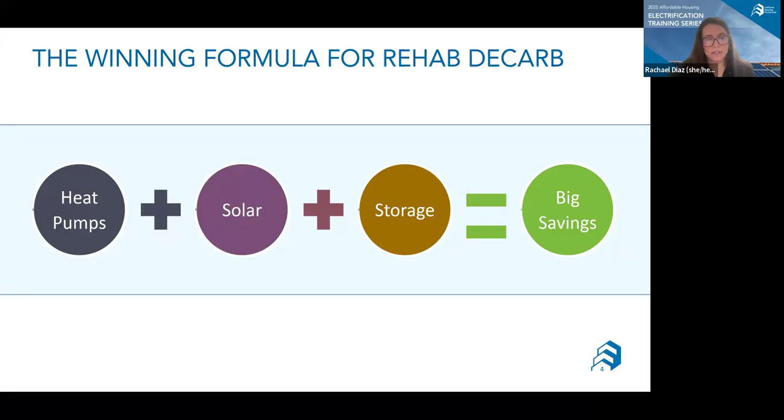Next slide, please. As I mentioned, decarb projects can be a little challenging. They can be expensive, and unfortunately the available funding oftentimes rarely covers the full cost of the project and the scope of work. Most incentive programs like grants or rebates may only provide partial support, which necessitates layering multiple funding sources, whether that be additional grants, tax credits, utility rebates, anything like that that can help close that funding gap. But again, layering not only improves the return on investment, it can help make larger, more impactful retrofits financially viable.

Next slide, please. Thank you. So first, when starting your project, it's important to start by defining your scope of work. That usually means beginning with something like an energy audit or a feasibility study to understand what's possible at the project site. And then from there, you'll need to prioritize measures that are eligible across perhaps multiple programs, things like heat pumps or building envelope upgrades. Those things tend to have the most overlap between the available incentive programs out there.

And once you've identified your measures, the next step is really to identify which funding sources apply. This could include federal, state, utility, and local programs. You really want to pay attention to that stacking piece of the puzzle, because there are certain programs that have restrictions on co-layering with other programs. Some programs just don't pair nicely, or there are sometimes stipulations around participating in some programs to cover the same technologies. So that piece is a little tricky. You'll want to pay close attention.

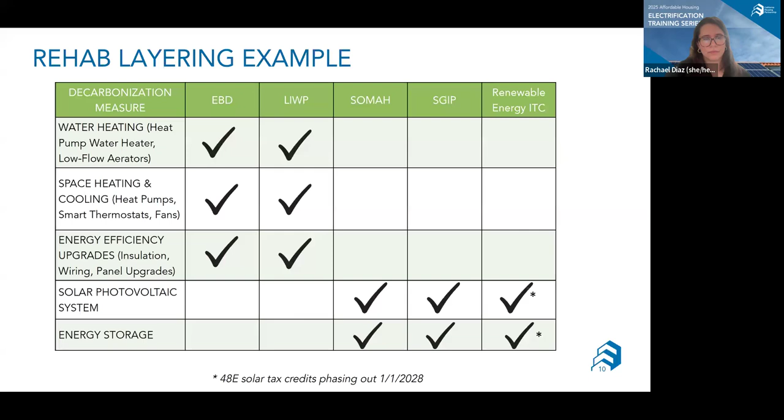Moving on to new construction, there aren't as many incentive programs out there for new construction as there are for rehab projects or standalone retrofit projects. But there are still some great options out there, both at the state level and regional level.

And the partnership does help to implement the Build program, so if you do have a project in mind, you can always reach out to us. Ian is our great lead here. So definitely recommend the Build program as a resource for new construction projects.

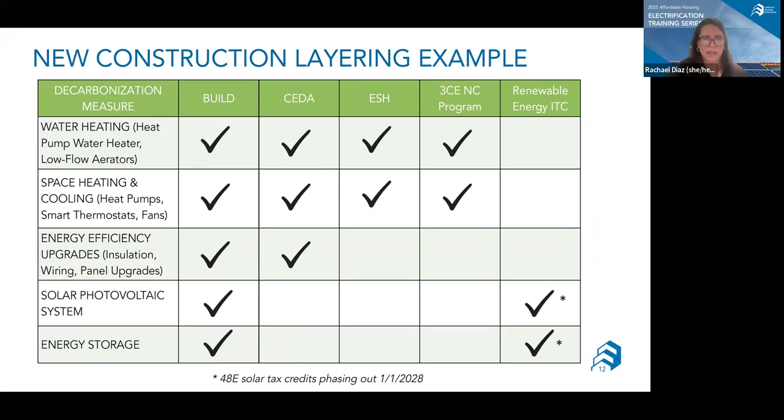Here is a similar breakdown of some of the key new construction programs and financing sources, along with each of the measures that these programs help to support. And as you can see, Build does have a lot of check marks here, so it is again a really great starting point and resource for folks.

Lastly, in addition to the incentive programs that I just walked through on the previous slides, tax credits can really help to make a project more affordable and viable.

It is important to keep in mind, though, that some of the tax credits, like the 48E solar tax credit, will only be available for a limited amount of time and will start to phase out very soon. I believe the date is after December 31st, 2027. So you'll really want to keep in mind these important timelines if you are planning to use solar tax credits for a solar project.

Some of the tax credits are remaining unchanged, but it's important to note that solar specifically will be impacted. So I'd recommend revisiting last week's session to get a rundown or review some of the upcoming policy changes that'll be impacting things like tax credit availability.

I know Andrew did a really great job last week breaking down some of these updates, so that recording should be made available soon to folks, either via email or posted directly on our YouTube page. So keep a lookout for that.

Definitely recommend revisiting, or ask questions if you have them about some of the tax credits, but definitely recommend that training as a resource.

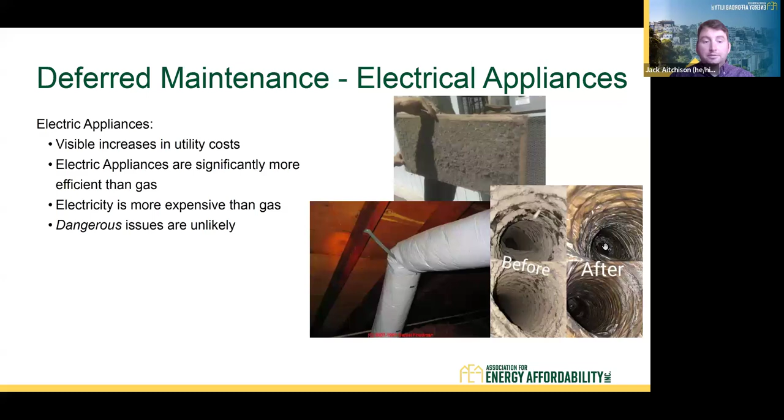Conversely, with gas systems, if you defer maintenance, you may not see a substantial increase in your utility costs. That's because they are already starting at such a low efficiency. Most gas wall furnaces are around 65% efficient, most gas forced air furnaces or water heaters are around 80 to 85% efficient. So if you're operating in that 60 to 80% efficient range and you have some deferred maintenance, your efficiency may drop 20%, which you're not going to see on your utility bills. That's only a slight increase in the consumption of gas.

However, when you defer maintenance on gas systems, you are going to see dangerous combustion safety issues occur. Now, the Association for Energy Affordability.

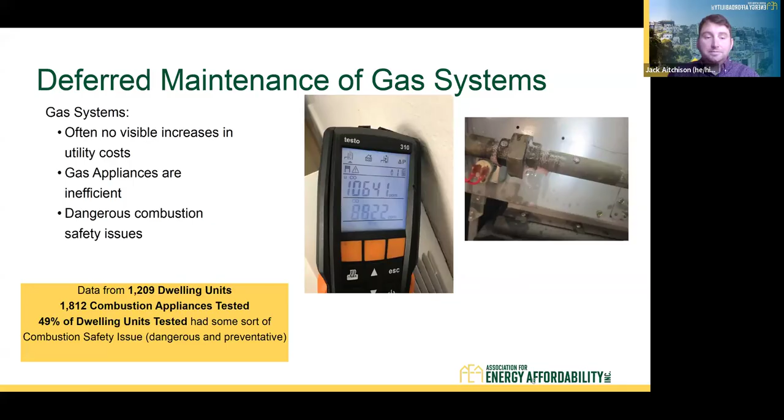When you are going into units for standard inspections, you should take a look at the air filter, maybe bring some cleaning material so that when your maintenance staff is inspecting those units, they can clean that air filter. Oftentimes with heat pumps, those air filters are reusable, so they're not like a forced air furnace where you have to actually replace the full filter. You can clean them. The heat exchanger and coils, so that outdoor coil, depending on your air quality, you may need to clean it more frequently.

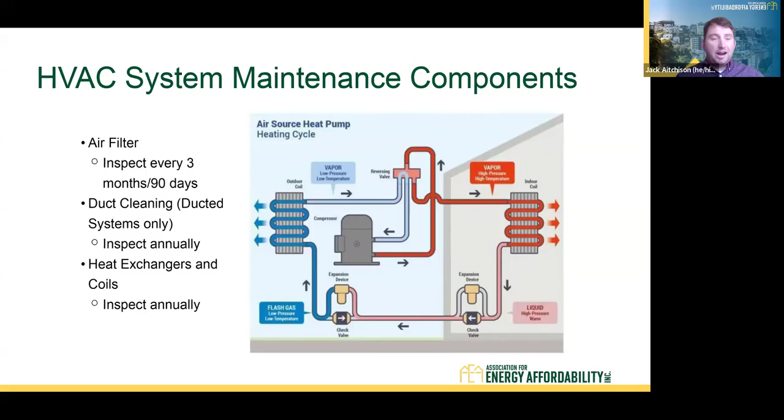So like I mentioned, I went into a little bit of detail on HVAC maintenance, but the focus of this HVAC maintenance and water heating maintenance is these tables here, and there's one for water heating as well. This is comparing the maintenance for electric heat pump heating and cooling versus a gas central furnace plus split air conditioner versus a gas central furnace.

So electric heat pumps are essentially air conditioners. The only difference is they have a reversing valve that allows the refrigerant to flow in the reverse direction, so it allows you to heat and cool using the same appliance.

If you take a look, indoor air filter inspection slash replacement, you're going to have to do that for both your electric heat pump heating and your gas furnace plus split air conditioner, because you have that air conditioner, which is essentially a heat pump. So you see all that overlap between gas central furnace plus split air conditioner. Now, if you just look at the gas furnace, you still have to do the indoor air filter replacement. If you have ducts, you still need to do the duct cleaning, but you don't have that indoor and outdoor coil inspection slash cleaning.

But at the bottom here, you have your gas specific things. And I will tell you, most people don't actually do these, but I would highly recommend if you have a mixed fuel building with gas appliances, you should be taking the time, maybe once a year, maybe every five years at the latest, to check for gas leaks, measure carbon monoxide and combustion gases, check ventilation and drafting, and do burner inspection slash cleaning. These are preventative maintenance items to make sure that your appliances are operating safely. These are things that you don't need to do with your electric heat pump heating and cooling.

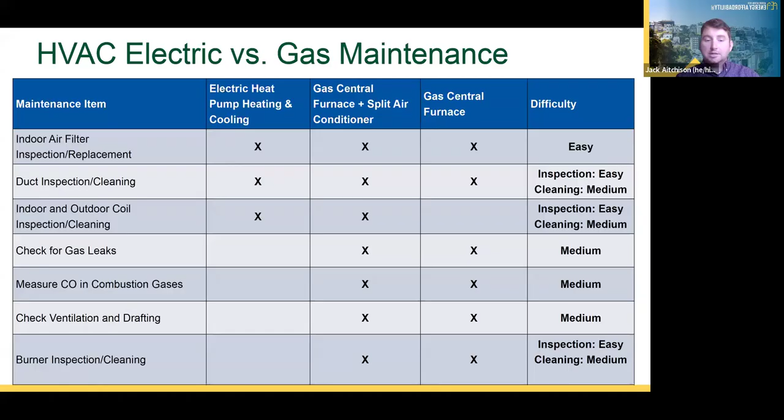Moving on to DHW maintenance. So we are talking heat pumps for heating, space conditioning, air conditioning, as well as water heating. As you could probably imagine, they have the same components. On the left is your air source heat pump for heating and cooling. On the right is your heat pump water heating system.

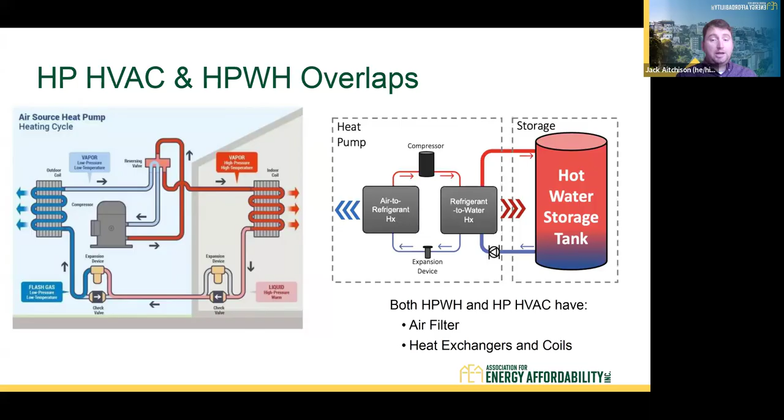You have an air to refrigerant heat exchanger that is the same as your outdoor coil. You have a compressor that is the same as the compressor in your air source heat pump. You have your refrigerant to water heat exchanger, which is the same as your indoor coil, and then you have an expansion device. You don't have the reversing valve because most of the time you are just heating water, not cooling it, so you don't need to reverse the flow of refrigerant. You have the same components: an air filter and heat exchangers and coils. The maintenance of those items is basically the same between heat pump water heating and heat pump HVAC.

One or two things you need to be concerned about specifically around water heating, not specifically heat pump water heating, although heat pump water heating can be more susceptible to some of these issues, are crossover and hard water.

Crossover is when you experience insufficient hot water delivery due to cold water entering the hot water line. There's a diagram on the right showing what that looks like.

Often crossover originates from failed mixing cartridges inside shower valves. They have rubber O-rings meant to isolate the hot and cold lines, and those fail over time. Some manufacturers say you have to replace shower cartridges every 2 years, some say every 5. I can almost guarantee no one replaces them that frequently. They're replaced when the tub spout drips, and by that time you've likely had crossover for a while.

So the cold water comes in, passes through the shower cartridge, then joins the hot water distribution, causing frequent fluctuations in temperature. Sometimes the temperature can never get hot enough for the resident.

This isn't specific to heat pump water heating, it's true for any central water heating system. However, because a heat pump water heater uses electricity, when that load increases and your electricity use and subsequent costs increase, you'll see that much more significantly than with a gas load increase, just because of the cost difference between electricity and gas.

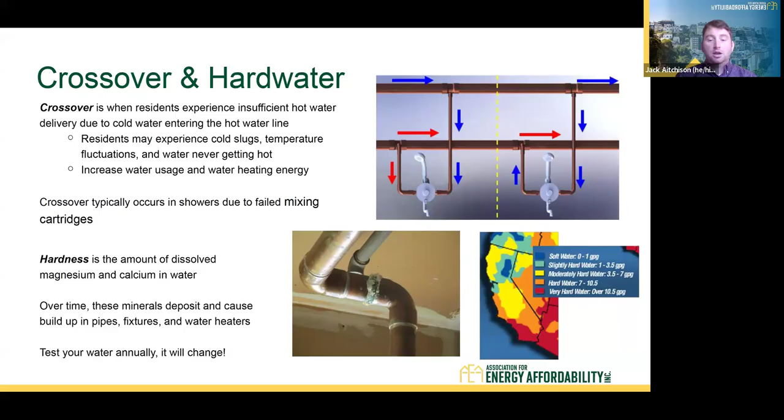Next slide, please. Again, here's a table. For heat pump water heating, you have air filter inspection and replacement, same as heat pump HVAC. You can see gas water heaters here—if you have a condensing gas water heater, a high efficiency condensing tankless or boiler water heater, you're also going to have an air filter that you need to inspect and replace.

Crossover prevention happens regardless of the fuel type of your water heater, but heat pump water heating can be more susceptible to increased utility costs, so it's important to do for heat pump water heating, but you should be doing it for gas water heating as well. Sacrificial anode rod inspection and replacement is for your tank—heat pump water heaters, gas water heaters, and boilers all have tanks, and you need to replace those sacrificial anode rods.

Depending on how hard your water is, you may need to replace those more frequently. Flushing heat exchangers for hard water, as I mentioned, can cause an error code for heat pump water heaters, while for gas water heaters, specifically tankless water heaters, that can cause a failure of the equipment. Then you have gas-specific maintenance items: checking for gas leaks, measuring carbon monoxide, checking ventilation and drafting, and burner inspection and cleaning. You can see the difficulty level here.

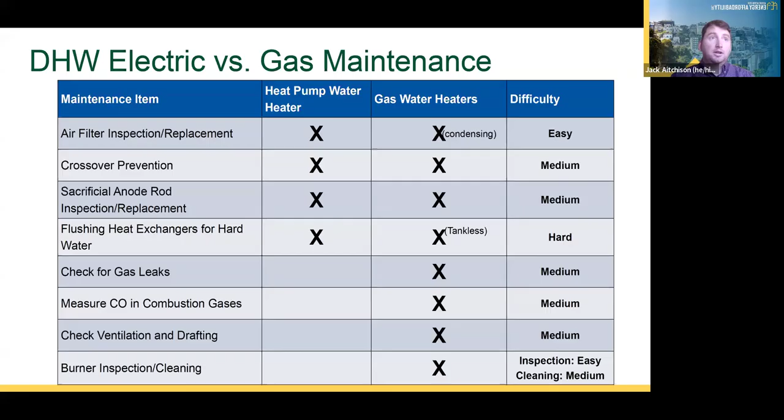All right, now on to induction cooking maintenance. So induction cooking, in all of our programs, we've been pushing for induction cooking over electric resistance cooking because of the fact that we have a lot of great tenant satisfaction. The cooking experience with induction is on par with gas. You can hear a lot of different celebrity chefs switching to induction. So you have that sort of cooking experience that's equivalent to gas, which is really important for our tenants.

Induction cooking is going to be cleaner, safer, healthier kitchens. There are also marketing opportunities because it's seen as a high-end appliance. Not really utility cost savings, so I wouldn't bank on a reduction in utility costs by switching to induction.

But some things that you have to think about as an asset manager, if you have a building with induction cooking, replacement cost is higher, so reserve replacement budgets need to be adjusted. You're not going to be able to get an induction range off HD Supply for $500. You are going to need to spend at least $1,500, so you need to adjust that replacement reserve.

Induction cooktop surface is the same as smooth top electric, easy to clean and refresh on turnover. I have had some building owners have some concerns around the glass cooktop, mainly food debris getting cooked onto it and being hard to remove. One thing that's different about induction than electric resistance is that it operates at a lower temperature, so you're not going to get as much burnt-on buildup as you would with an electric range with the same glass cooktop.

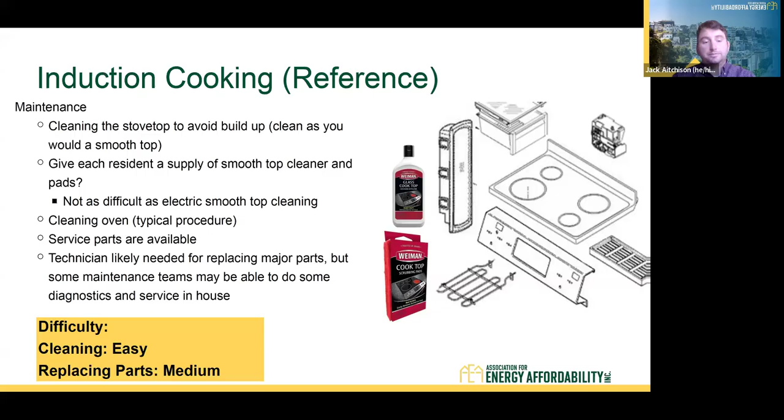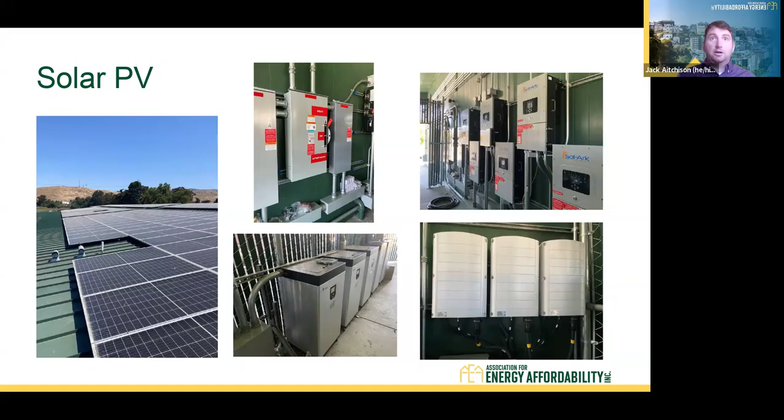The main thing that you need to think about in terms of maintaining your solar PV systems is monitoring them. So if your battery or your inverter fails or if your panels are dirty, you're going to see that in your utilities. So there are two ways that you can monitor your utilities for your solar PV system. It is monitoring at the meter level, so that's looking at your utility bills using Energy Star Portfolio Manager or WeGoWise. But ideally, you would use something like a performance monitoring system that's incorporated into your inverter, where that's real-time data. If you're using your utility data, it could be months before you realize that your solar PV system isn't working. Whereas if you have this performance monitoring system on your actual equipment, you can set up alerts and see in real time if your system is operating properly.

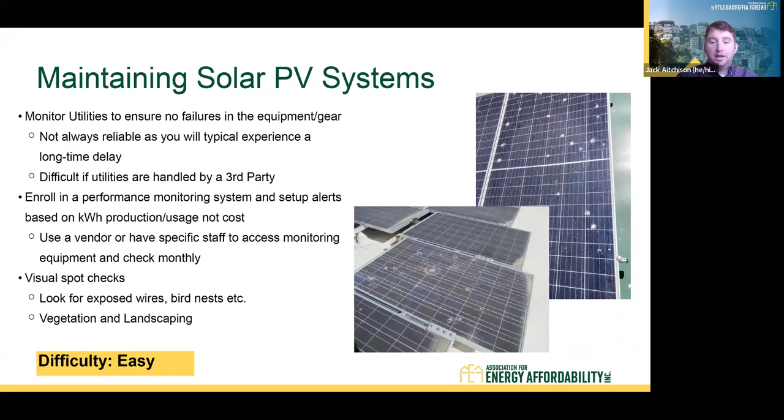And then we also recommend that your maintenance staff do visual spot checks, look for exposed wires, bird nests, vegetation, and landscape. These panels on the right are not operating very efficiently. One has a whole bunch of bird poop on it, and the other was hit by golf balls. These are going to be things that you may see in your utility monitoring, you may see in your performance monitoring, but doing your visual inspections, it's a lot easier to identify those issues. Next slide, please.

Again, this is for reference.

You should clean your solar panels. They will operate much more efficiently when clean, and the cost to have someone clean them is usually much less than the benefit or offset in utility costs for having clean solar panels. Now, I will say some areas, like Humboldt County, may rain enough that you don't need to worry about cleaning them, but elsewhere, you should clean them frequently.

All right, utility monitoring. I'm going to focus a bit more on this. The importance of utility monitoring, going back to the myth-busting piece, when you have an all-electric building and you're deferring your maintenance or improperly maintaining your equipment, you're going to see that in your utility costs. The best way to determine if you're maintaining your building properly is utilization of either utility monitoring software or building management systems.

For utility monitoring, you have Utility API, WeGoWise, and Energy Star Portfolio Manager. You need to be considerate that you're not going to get the data for a while—it may take a month, since this is based off your actual utility bills. So there's a delay in getting the data and a delay in alerts, which, if your utility costs are increasing substantially, you may want to get ahead of it with something more in-depth, like a building management system. We'd recommend working with account manager reps for these modern utility monitoring softwares so you can set up alerts and use them to their full potential.

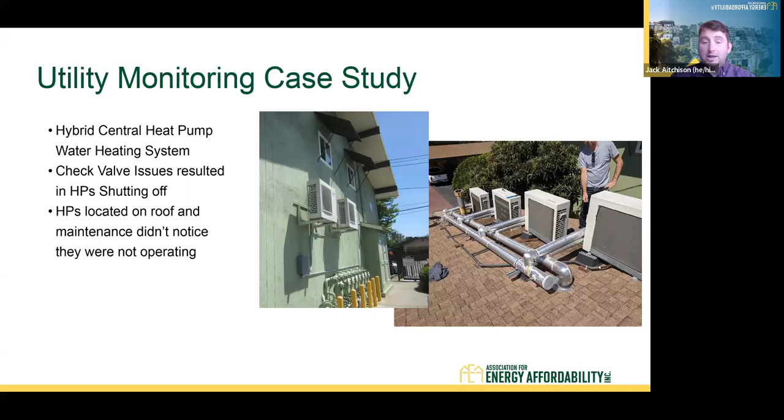What ended up happening is you start to see the gas usage over the year sort of tick back up. Fortunately, we were monitoring this building and we were able to see that gas usage increase. Because of that, we went out to the property and found out that the check valves had failed in the heat pump water heaters. By replacing those, we ended up getting back to a more normal energy usage pattern.

This highlights the details and how difficult it can be using utility monitoring. If we were to set up alerts, you should be really critical about seasonality. The winter months, we're seeing more gas usage. So when you're setting up your alerts, be very meticulous on what is going to trigger an alert so that you can identify these issues.

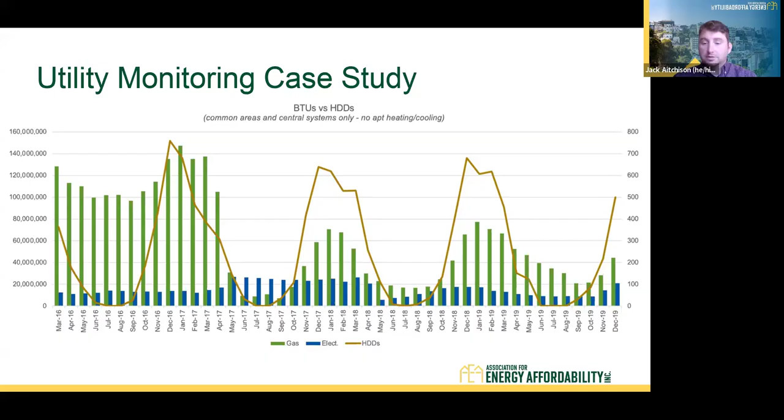Utility allowance: make sure to use the appropriate schedule. For space heating, some housing authorities have an electric heat pump UA which is lower than the regular electric space heating one. For air conditioning, do not forget to include it if you are using package terminal heat pumps or split systems. Water heating does not apply if you have a central system.

One thing to note here, if you have solar benefiting your tenants, and if your financing stack allows it, consider using CUAC instead of the housing authority, because CUAC can take advantage of the solar benefiting your tenants for your utility allowances. It's not always viable, especially in depressed markets with high AMI counties.

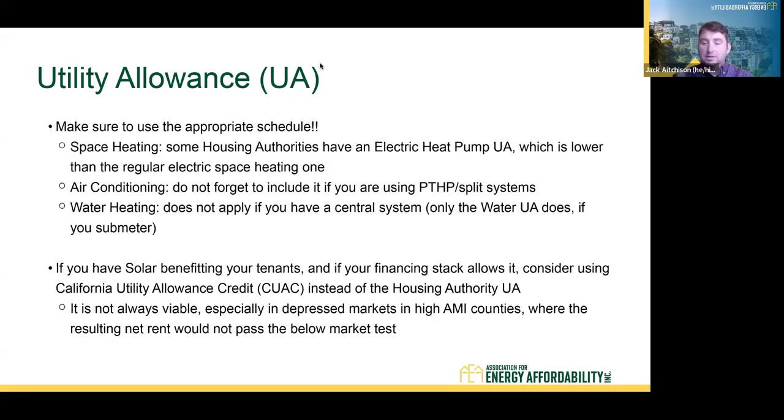Going a little bit fast because I'm running out of time. Working with residents.

All electric buildings may require resident education to improve tenant experience and efficiency of equipment and operation.

In our retrofit projects, I cannot emphasize enough how important hosting educational resident meetings and trainings are. You can host cooking demonstrations during that time. You can also provide pot and pan sets for new tenants. When retrofitting properties with induction cooking, during those cooking demonstrations or educational resident meetings, ultimately people want to be in the know. What we've experienced is that when we are upfront with the tenants around what we're going to do in their property or in their home, they are much more receptive to it.

All electric buildings may require retraining how folks interact with their HVAC and water heating systems. Most people that use wall furnaces turn them on, heat their apartment in 5-10 minutes, and then turn them off. That is an inefficient way to run heat pumps.

We also hear a lot from folks that they turned their heat pump off because it was running for more than 30 minutes and they're afraid of their electricity bill going up. Heat pumps run very, very efficiently and run for long periods of time. So re-educating people to make sure that they're taking advantage of their new equipment is super important.

Provide support on how to read a utility bill, especially when you have net energy metering or virtual net energy metering, and train your on-site staff to help people navigate their utility bills.

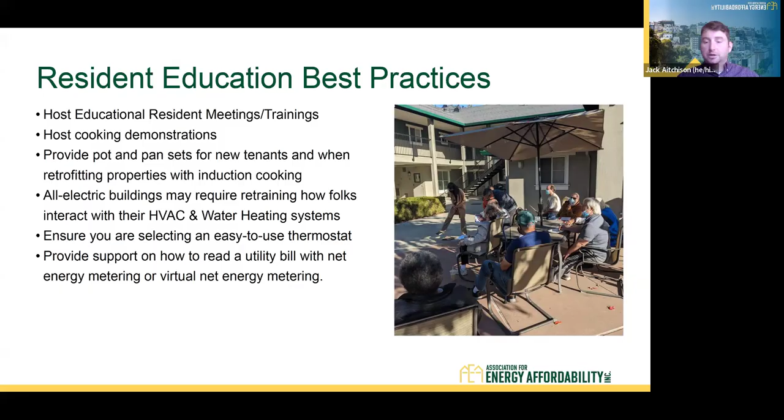Choosing a thermostat: the out-of-the-box thermostats for a mini split are poor. They are confusing to use. They're remotes that can be expensive to replace if they get lost. Consider a third-party thermostat, and consider having a pamphlet left behind on how to program and schedule it.

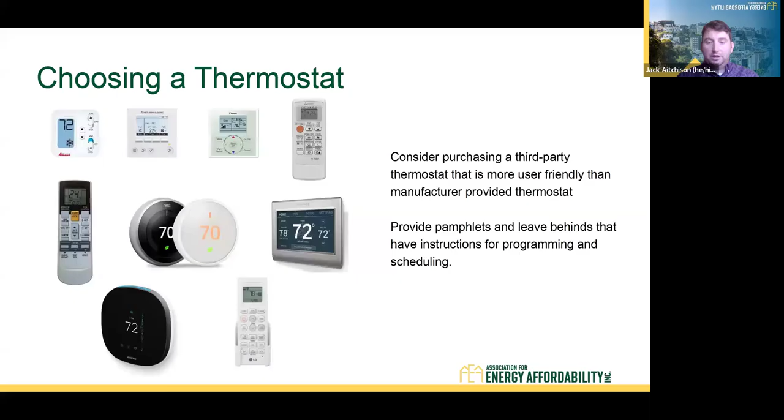Resident utility bills are confusing. Make sure that you have someone on site who can help them navigate their utility bill. Confirm residents are on the correct utility schedule, especially after rehab. Unfortunately, through our programs, we cannot change residents' utility schedules—they have to do it themselves. So you need to provide support there, provide tenant leave-behinds explaining solar, and help them understand the utility bill true-up, CCAs versus IOUs, time of use, etc.

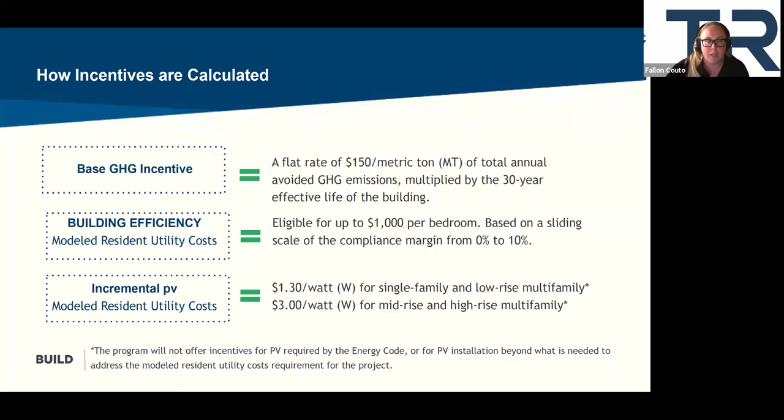The 4th category of incentives is the kicker, or bonus incentives. These are not mandatory for applicants, but provide excellent reasons to install equipment that enhances energy efficiency of the building or home, such as grid flexibility. This includes smart thermostats, JA13 compliant heat pump water heaters, induction cooktops which offer $300 per unit, and electric vehicle supply equipment, which provides various levels of incentives.

Here I've broken down the incentive details for our case study, Fairhaven Commons. The first was the base GHG incentive, which was $218,970, based on the GHG emissions avoided. The next was overall building efficiency, which brought in $96,860, based on the percent above code per their energy model.

The next category would have been the incremental PV, based on the modeled resident utility cost, but for this project they didn't implement that, so we jumped right to the kicker incentives. They brought in $36,000 in incentives for additional GHG reduction technologies. Overall, the total incentive for Fairhaven Commons was $351,830.

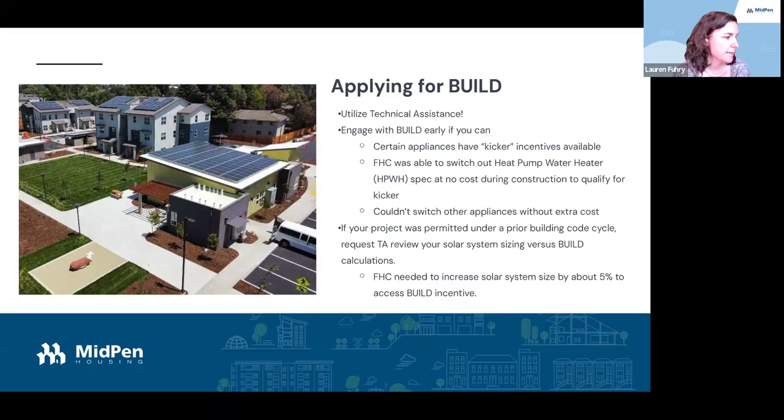Beyond Build, I learned a lot of lessons just getting our solar system off the ground with PG&E. All of my experience is here in Northern California, so I apologize—I'm not sure if any of this translates to SoCal Edison, but this is my experience with PG&E.

If you have a solar system, it has its own application and agreement. You'll have your temp power where you apply and sign an agreement, firm power, and then interconnection is its own thing. On my projects, we've typically submitted our interconnection application early in construction, which kicks off a long process culminating in signing your interconnection agreement and getting permission to operate, or PTO, after construction completes and the system has been inspected and approved by PG&E.

I strongly recommend working closely with your solar installer and designer, whether they're the same or different, to find out who's going to be on point for navigating this interconnection process with PG&E. There are a bunch of steps, and the timeline really depends on who your contact is at PG&E and how engaged they are. It can easily take the full course of construction just to get a draft interconnection agreement ready. Then ultimately, the really important milestone is permission to operate.

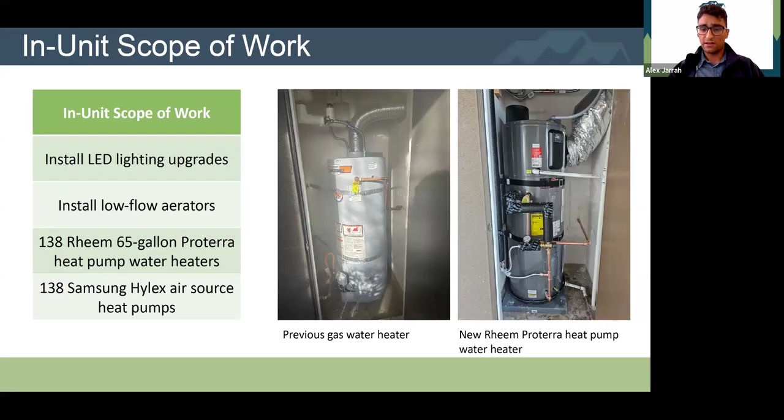On the left here, we have the previous air conditioning unit, and these were replaced with Samsung Hylex heat pumps. These heat pumps are really great because you're able to reuse your existing refrigerant lines and electrical wiring, and that's a great way to cut down on costs.

Some of the noteworthy tips that come out of the in-unit scope of work is that the project team started with an in-unit mock-up. While they were waiting for their incentive applications to be approved, they went ahead and installed all the measures in a single unit, which allowed them to troubleshoot any problems that came up. So when it became time to scale the project to all the other units, they were able to be in and out within a day and minimize tenant disruption.

As I mentioned, they reused existing refrigerant lines, electrical wirings, and ductworks. They were also able to reuse the existing air handling units in tenant units by just installing a new control, and they kept the existing thermostats to minimize the change in interface for residents. So it's really important to think about the tenant experience when it comes to installing these measures.

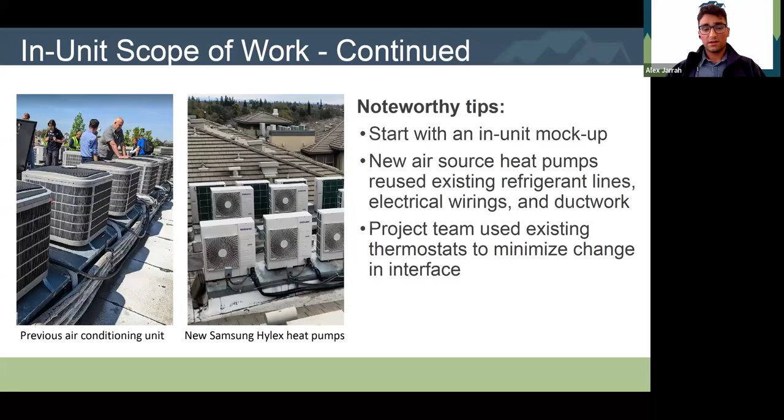I won't spend too much time on the common area scope of work because it includes a lot of the same measures as the in-unit scope of work. But Foothill Farms does have a pool, and they did electrify the heating equipment for the pool, replacing boilers with heat pump pool heaters. A neat thing about this project was that by removing the boilers that were housed in the utility room, they were able to have a bunch of empty space that they could then use as additional storage.

They also went ahead and installed 30 Loop Level 2 electric vehicle chargers. And while they did not electrify their dryers, they did install the circuits and outlets necessary to electrify the dryers in the future. In this project, the dryers were still within their useful life, so it was just not time, but that's important to keep in mind with these types of projects: what can't you electrify now, and how can you prepare for that moving forward in the future?

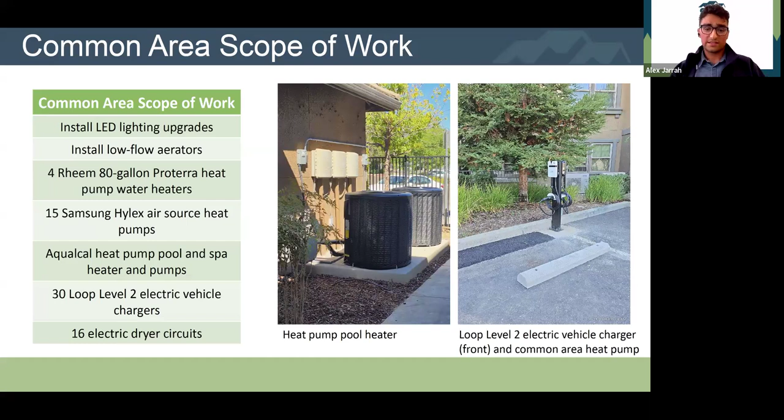The project financials for Foothill Farms are pretty impressive. The total project cost came out to just shy of $2.6 million. But by leveraging all these different incentive programs, including LIWP, SMUD rebates, and tax credits, the total bridge housing contribution came out to only $27,000. That's really good for an affordable housing provider, and is well within something a property can take on.

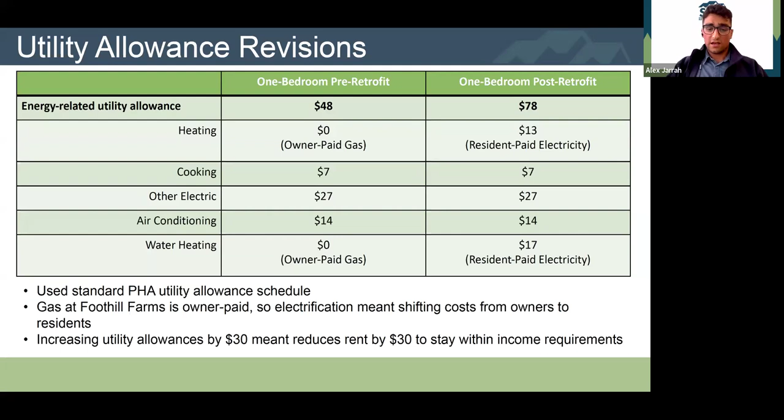This arrangement can really result in a win-win for both owners and residents. On the resident side, utility allowances went up by $30 and rent payments went down by $30. But because the equipment they installed was so efficient, their actual anticipated energy cost increase was only $12. So the resident cost savings per month are about $18.

On the owner side, because the owners are no longer paying for natural gas, they're saving about $75,000 in utility costs, but losing about $50,000 collectively in lost rent. However, this still results in a total increase in net operating income simply because the utility savings of getting off gas exceed those of the lost rent. So this is really a win-win for residents and owners.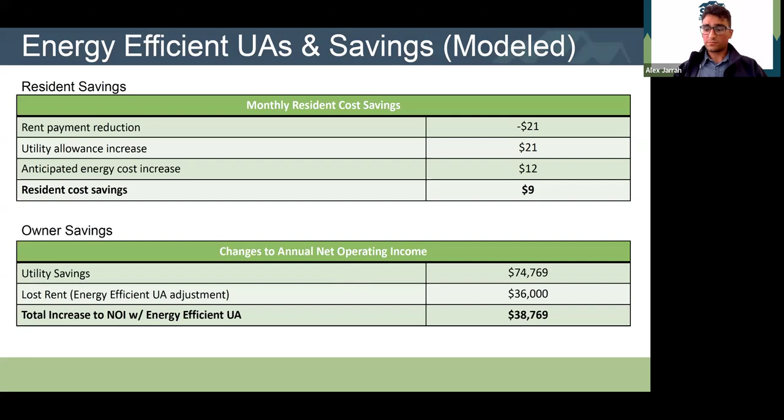So some key takeaways and future considerations for this project. One, we recommend partnering with a full service energy consultant. There are more consultants coming out on the market with expertise in not only electrification, but also navigating and accessing incentive programs. And we're finding that the more developers work with these consultants, the more they're able to access incentives and really minimize their contribution.

Second, we recommend evaluating your full portfolio. We estimate that in any given portfolio, there are about 5 to 20% of properties that fit this Foothill Farms typology that can electrify while also resulting in win-wins for owners and residents. And SAFE actually just published another case study of a Mercy Housing property in San Francisco last week that walks through how to identify these candidates for electrification. Definitely recommend checking that out.

Third, we recommend considering impacts to residents, including utility allowances and also tenant experience. Reuse what you can, like I mentioned - electrical wiring, ductwork, refrigerant lines - and really try to cut down on those costs where you can.

And then lastly, monitoring building performance. By benchmarking and monitoring the energy performance post retrofit, the project team was able to confirm that the actual savings measured up to the project estimate. So that was really great to see.